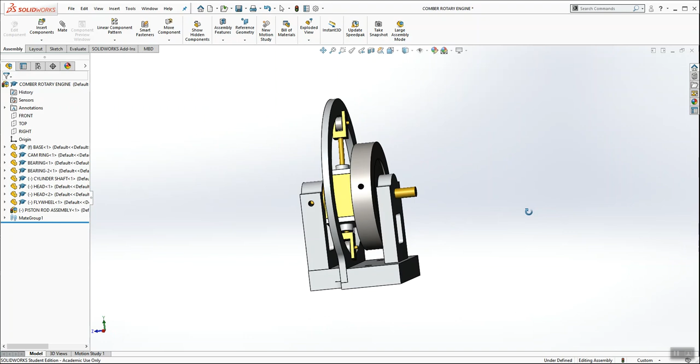This is a rotary valve engine that uses a cam machined into this part right here that looks like a ring. There's actually an internal cam profile that I will show you real quick. So there's the cam profile—somewhat of a headache, but simple as far as cam profiles go.

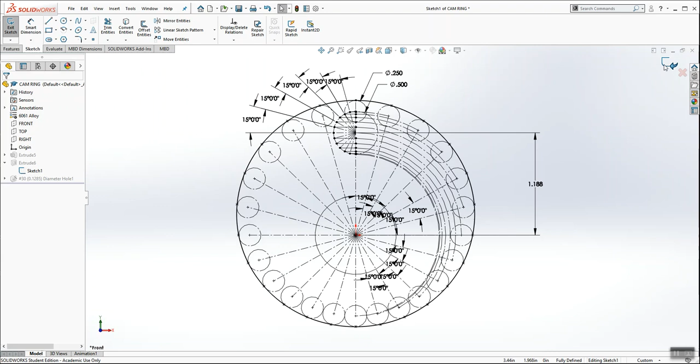It's very difficult to see, but it is an internal cam, and what this internal cam does is it uses a couple of followers that move the piston back and forth on the inside. So let's take a peek on the inside to see what's going on.

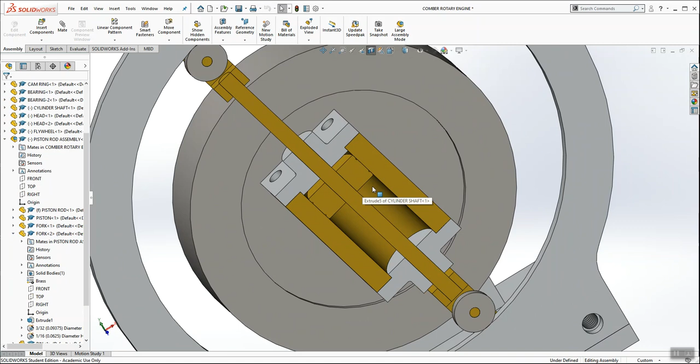So you can see the piston on the inside, a couple of oil grooves. So when the flywheel rotates, that piston is transferring the air from one port to the other.

Pretty unique little engine. The only advanced mate would be that cam mate, and I'm pretty sure I saved that mate for dead last.

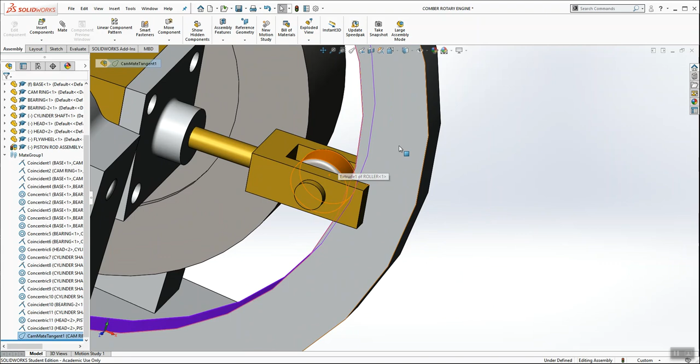So if you look at my feature tree, there's a cam mate. The face of the follower is tangent to this purple face here on the cam profile. So that's a little bit of insight as to how the engine works.

You're going to be designing a base for this engine, and the parameters for that will be in the instructions.

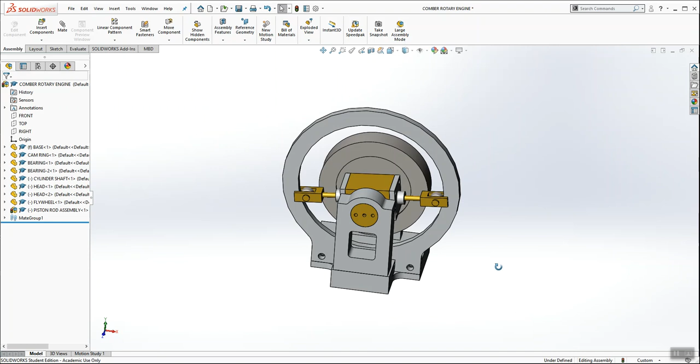Here's the base that holds this engine together, but you're going to be designing a base that this entire engine gets mounted to, and here are the clearance holes right there. So you've got one there and one there—a couple of mounting holes to work with. You've got some real estate above to put the head of a bolt, so that'll be a fun bit of design.

Let's take a look at the piston rod subassembly, and I want you to create the subassembly the same exact way. I started with the piston rod, and then I added a piston in the middle.

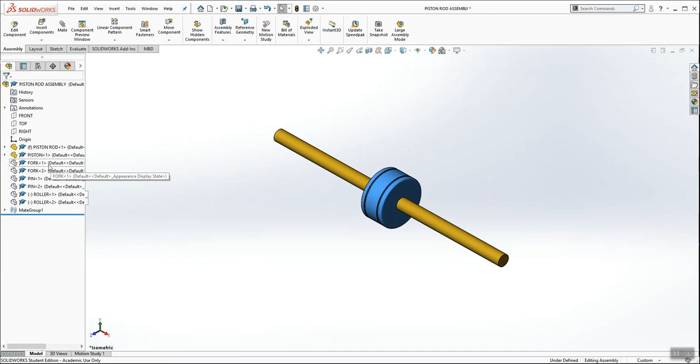Then I added forks on either end, and I made sure that they were fixed, so they're not floating—they're pinned together.

The piston itself is dead center. Then I added a couple of pins.

The rollers are last, and I left the rollers free floating so that they're able to spin. You can't really see it spinning, but it's able to rotate, and it doesn't affect the assembly whatsoever whether it's fixed or not—at least I don't think so.

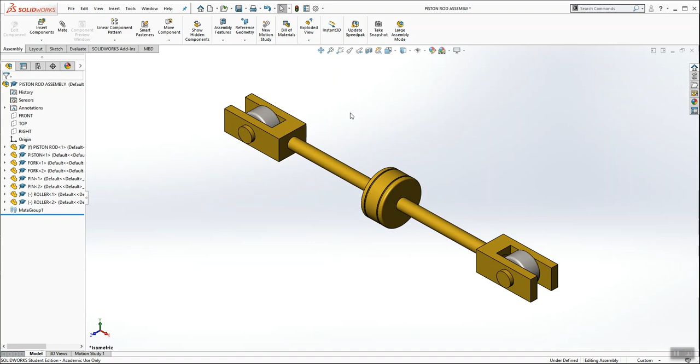So this was your piston, the piston rod assembly, and here's the main assembly. Let's take a look at how this was constructed. I'm going to hide these components temporarily.

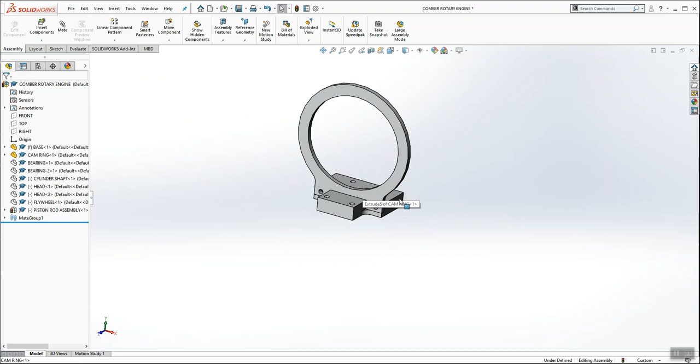So there's the base. Cam ring was next, so I mounted that in place—it nests inside this little groove, and bolts would hold it in place. And there's a couple of bearings.

You've got the first bearing and the second bearing. The only difference is this one has a larger bore for the valve, and this one is just a plain through hole for the end of the crankshaft.

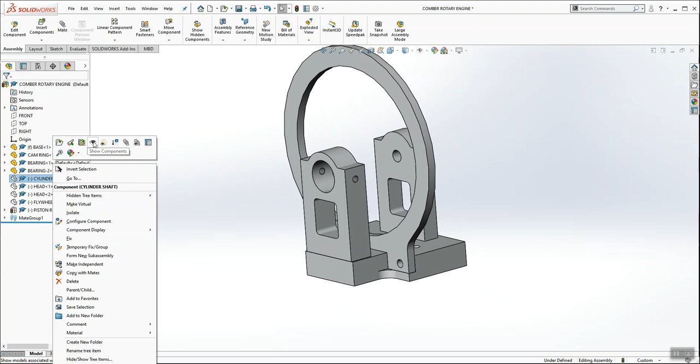And then the cylinder shaft is here. You can kind of see this end is where the ports are. This is going to rotate, and this free end is just sticking out the back side.

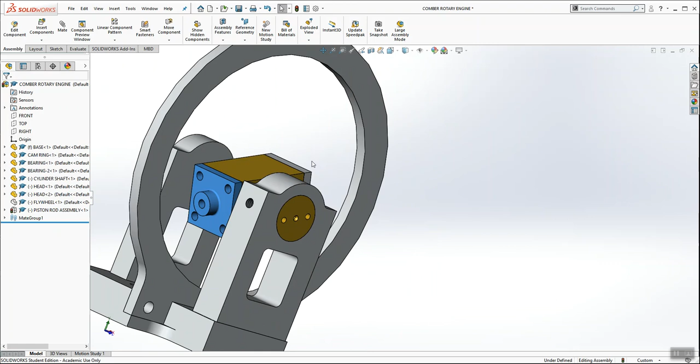Both heads of the cylinder are identical, so there's one here that caps it, and there's another one on the back end that caps that side. They're identical, using 4 bolts that fasten it in place.

Then there's a flywheel. The flywheel sits inside and is connected to the shaft so that as I rotate the flywheel, it rotates that cylinder at the same time.

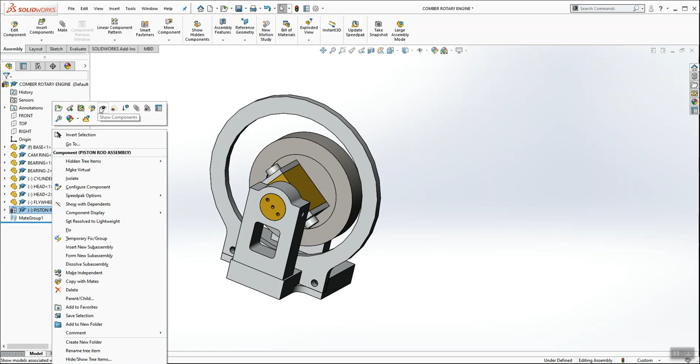And then last but not least, the piston rod assembly gets fastened. Very simple. Let's take a look at the mates that are in this subassembly.

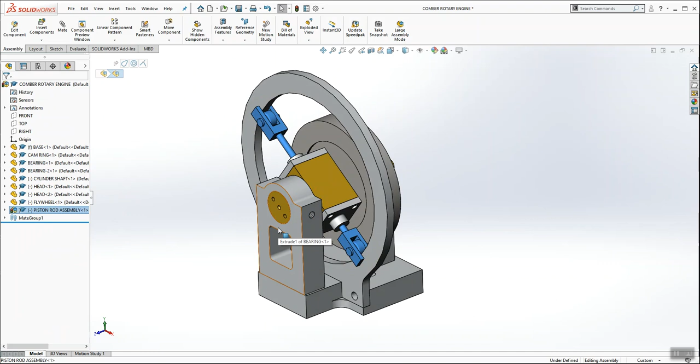Quite a few to build the subassembly, but very simple. You insert the piston rod assembly in place with a concentric mate and then the cam mate, and you've got yourself a working engine.

So with this, the subassembly and a base that you're going to design, you're going to pack and go all of this to me. It's due by next Monday.

If there's any questions on pack and go, I'll do it one last time. So you have to navigate up to the file drop down, pack and go, and you have to remember to click right here where it says save to zip file.

Because what that's going to do is zip up all of the components and all of the subassemblies, including the main assembly, into one zip folder.

So you can browse and drop it into your week 3 folder for this course, or on your desktop, or wherever you're keeping things. And you click save.

What that's going to do is it's going to save every single thing that I need for grading, and you can email that to me the same way you have been forever.

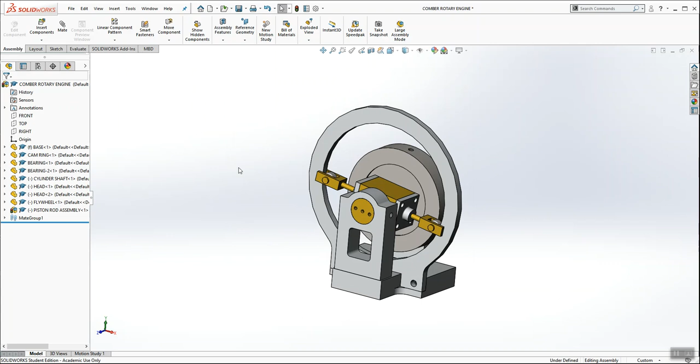So great little assembly, good assembly practice, and the only advanced feature really is the cam mate. I don't know why they consider that an advanced feature, but it's very simple to use, and that's your week 3 assembly assignment. Thank you.